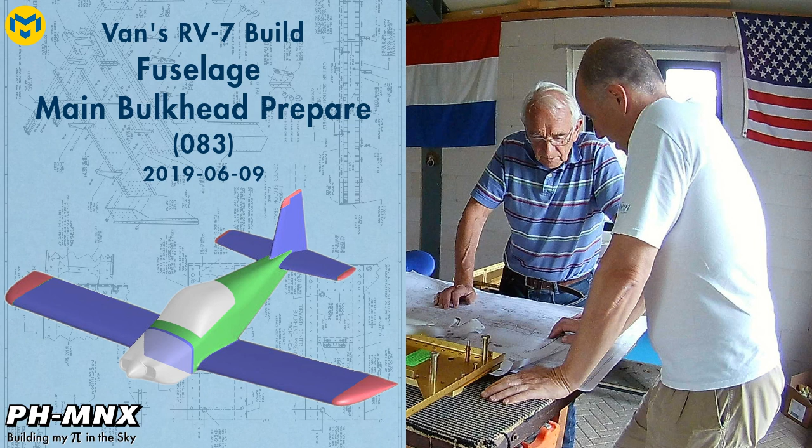Today I worked together with my dad, finishing up some last rivets from the firewall, which I couldn't do by myself. And we started on the second bulkhead, which is the main bulkhead, which attaches the wings with the spars to the rest of the plane.

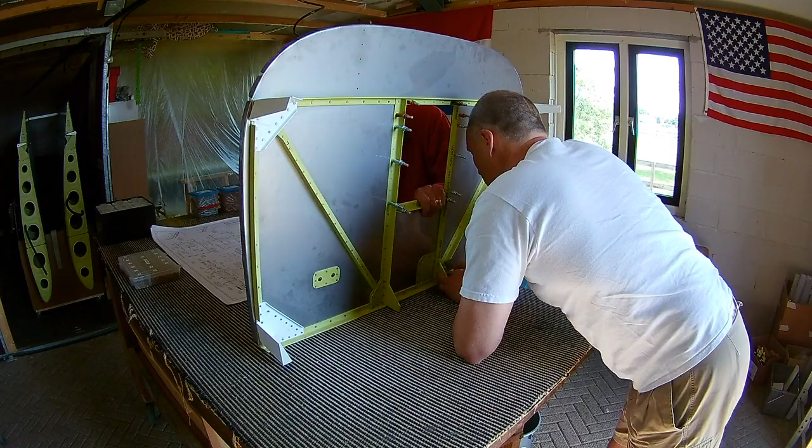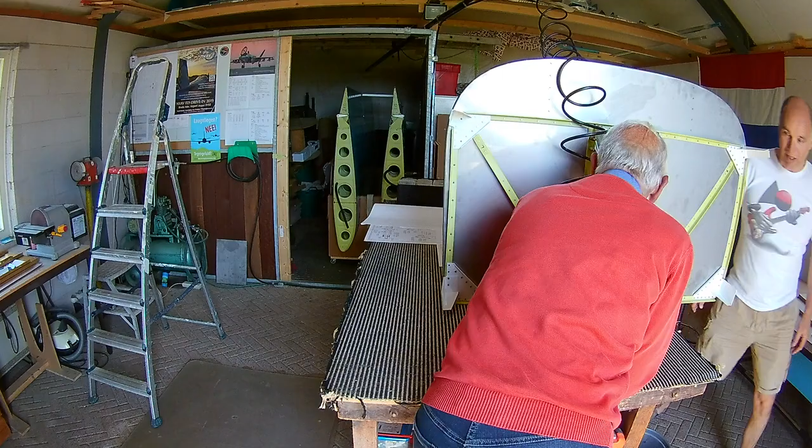From the previous video you can see that I back riveted the firewall myself. There were a few rivets which I showed I couldn't do because it wasn't possible with back riveting. So I fixed those now when my dad joined. They're just, let's say, 8 rivets that were just too close, and there were 2 nut plates that needed to be attached, which I screwed up by the way, so that's why we had to drill them out again.

Actually, it was not the firewall that we worked on today, except for this part. We are starting with the recess. So we also did the recess, which is a small part, and there were a few rivets, which it actually turned out I could do myself because I could catch them with a squeezer. Okay, we start with the main bulkhead.

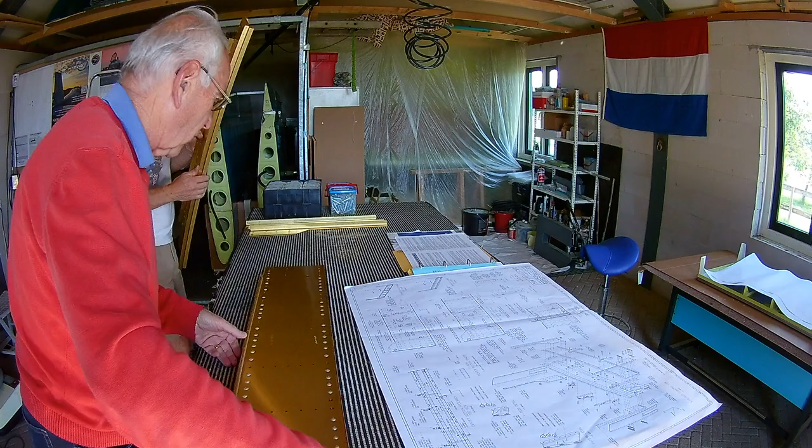It's a new part. It turns out that if you look into the plans, there are a lot of bulkheads in the fuselage. And the trick is you have to build all the bulkheads, and when you've done that, then you can attach them with the skins. So this is the main bulkhead.

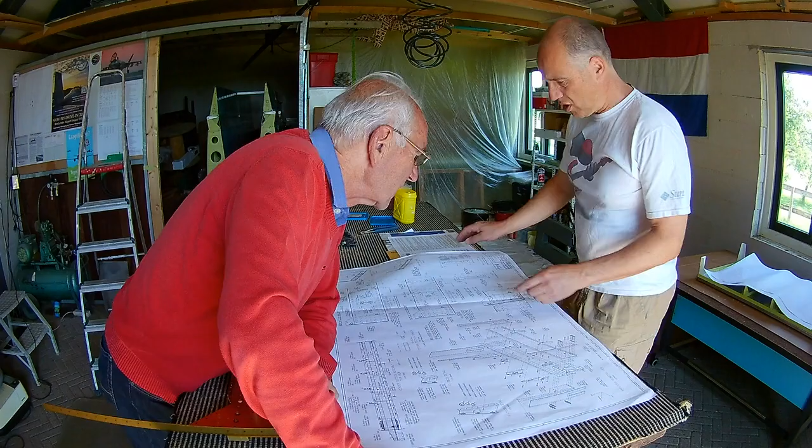With the main bulkhead, these parts were actually in the wing set, so they were not in the fuselage kit, and that's because they are actually drilled together with the wings. So they should be a very tight fit, and that's why they're in the wing set. But the drawings are in the fuselage kit, so we start working on it now.

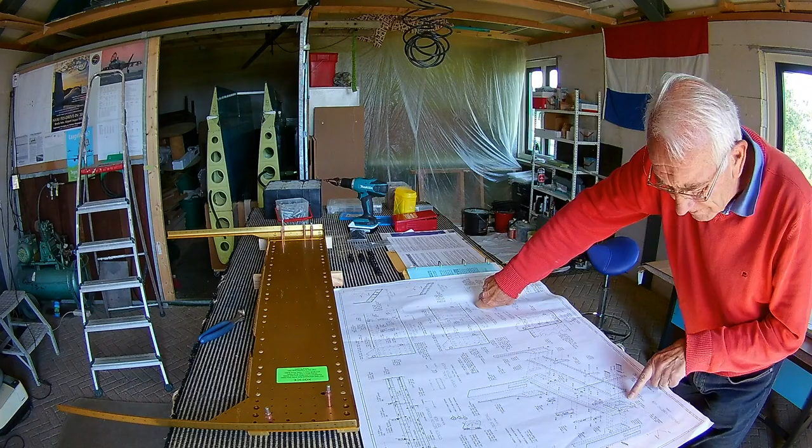There need to be some bushings drilled in there, which are quite big holes. So before I start drilling big holes, I always check the drawings several times, because if you screw it up, it will be really bad, because I don't think you can actually replace this, because, as I said earlier, it was drilled with the wings, so that will be really an issue. So there's not a place to fuck it up.

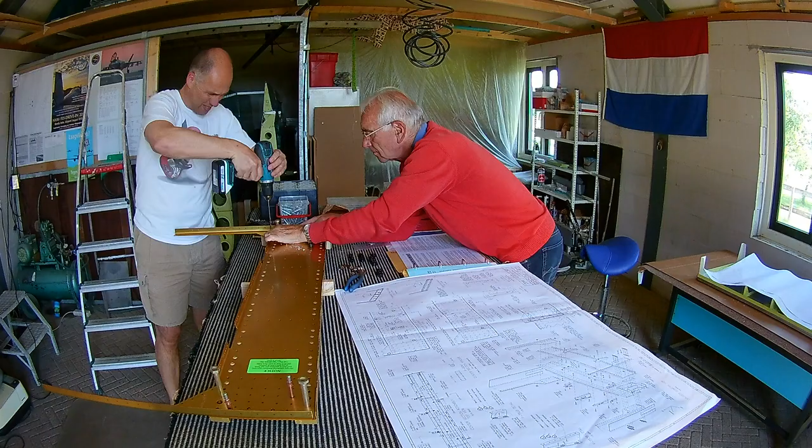So what you do is you add the doublers, and then you put in the bolts, the big bolts, which hold the wings later. Yeah, and then you drill the holes. You use uni-bits for that, which are kind of sawing holes. You can see that here, right? Really big holes, man. The holes are actually for rudder cables and for electricity.

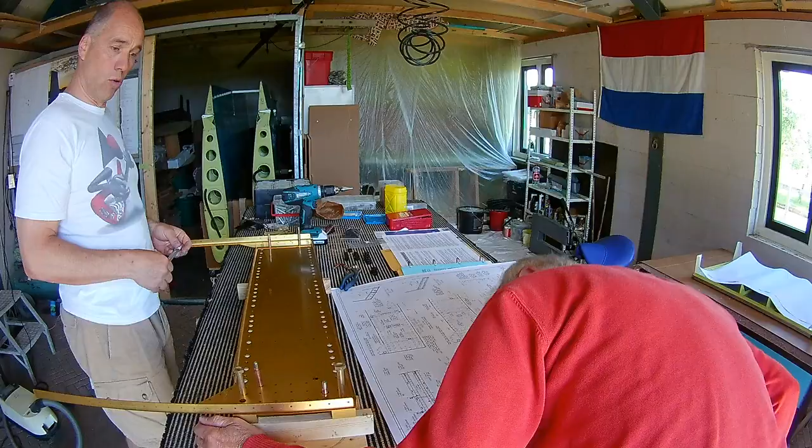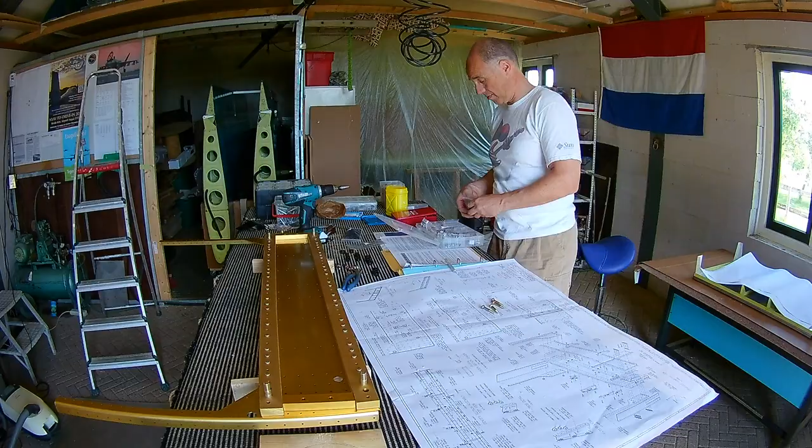So it looks like I'm doing everything twice, and that's the case because there is a forward and an aft bulkhead part. So you see me sometimes switching it, and that's actually switching between forward and aft. So this is the aft one, where there's not much riveting actually. It's more like fitting stuff together and seeing what should be connected. So I didn't rivet much today, it's mostly just looking at how everything should work.

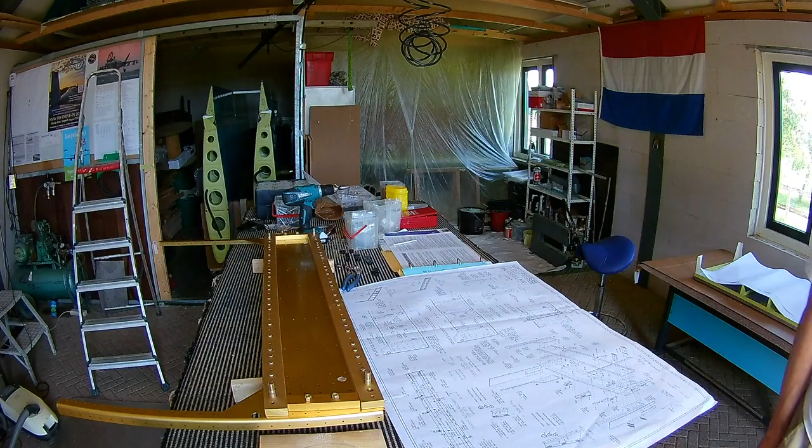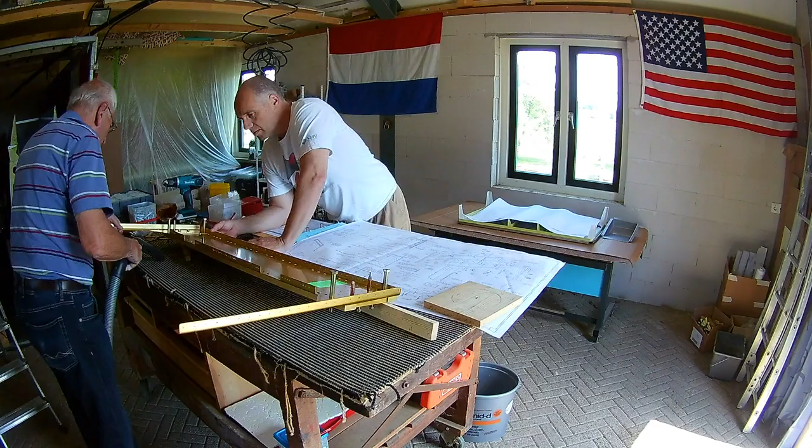Also the drilling, you could use the air drill for that, but somehow I like the electric hand drill. It works really good. As you can see, a lot of drilling, and you also have to be careful there. Again, if you fuck this part up, you're probably in deep shit.

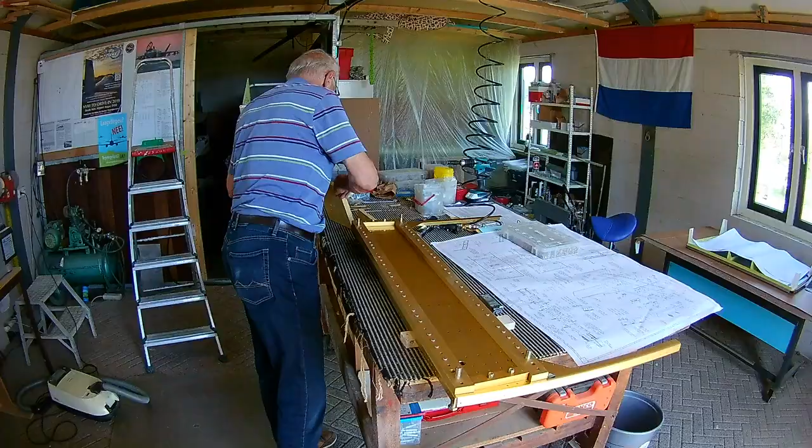So I'm going to build several bulkheads. This week I went to a fellow builder here in the Netherlands, and he already had several bulkheads built. So I see now what the way to do it is. So you build all the bulkheads, and then you connect them together with the longerons and the skins.

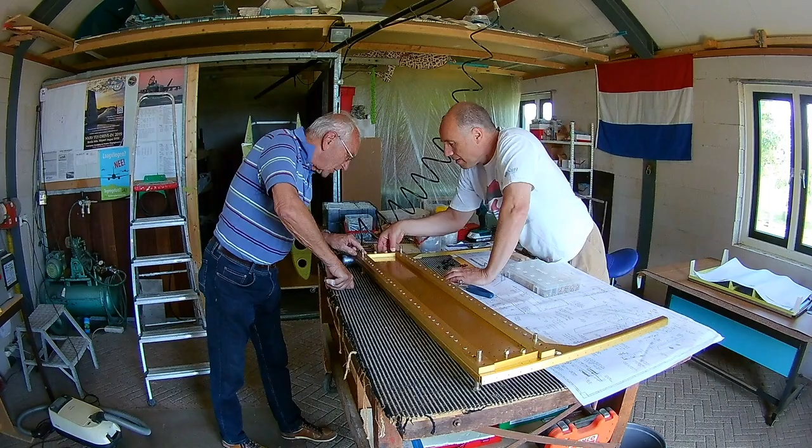That's interesting. This is actually where the control sticks are mounted, and here I forgot actually to turn the camera. It's not so smart. And you have to trim some material from it away. That's not very easy because it's very thick material, as you can see. It's also on the workbench, the aluminum color bracket. So yeah, you can see it.

I use a jigsaw for that because I don't have a bandsaw. Every time I'm thinking maybe I should buy a bandsaw, and every time when I just either use the handsaw or the jigsaw, it always works great. So I think, nah, probably not.

The only thing I figured out actually this time is that I had a wood saw in my jigsaw, so that's really stupid. I thought the teeth were very close, so I thought it was metal, but that was wrong. It was for a very typical wood. So I actually bought new saws for the jigsaw, which are actually metal saws. So next time it should be better.

Right. This is the aft part again, and there are some stiffeners which are needed to attach a front panel. Oh yeah, here we are attaching actually the control hinges, and you have to check that with the actual controls. So that's nice. You can already see what it will become. Also, I'm really puzzled by how small the plane is. I mean, how it's not very wide.